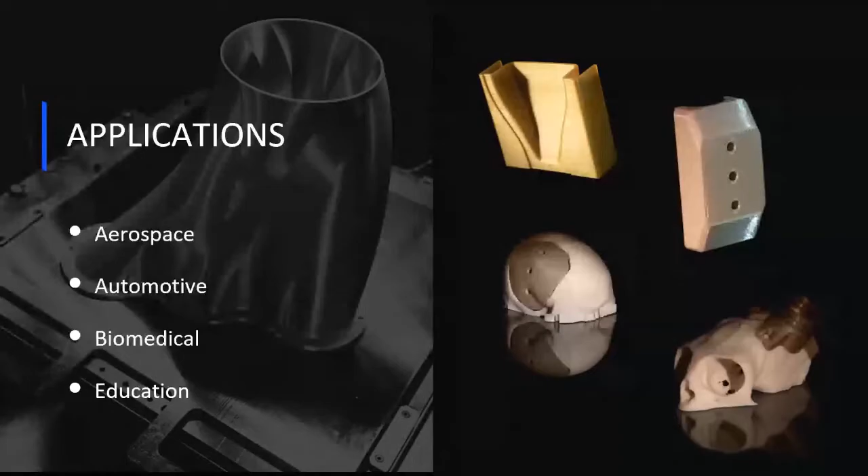So, what makes PEKK, PEEK, and ULTEM so special? If you signed up for this webinar, you've probably already heard that they're the strongest 3D printable thermoplastics on the market.

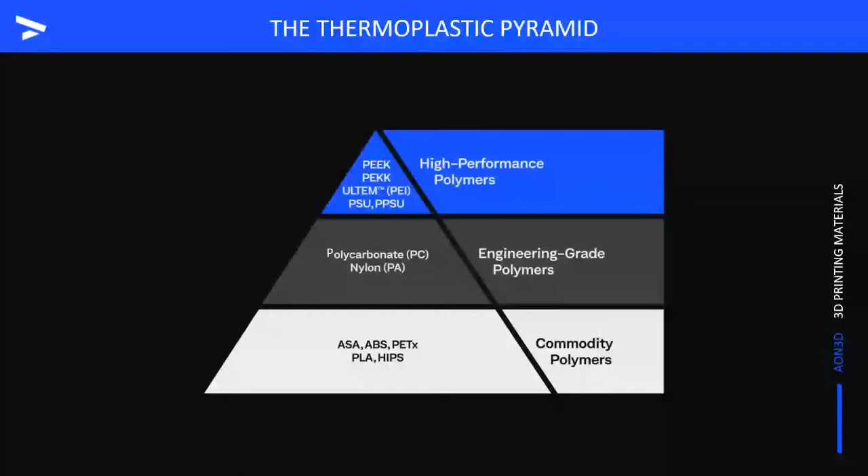In order to completely explore the exciting world of printing high-performance thermoplastics, we need to briefly touch on some of the key differences that separate these materials in the 3D printing world. Some polymers, such as PEKK and PEEK, are semi-crystalline, whereas others, like polyetherimide, are amorphous. PEI or polyetherimide is more commonly referred to by SABIC's trademark name, in North America, ULTEM.

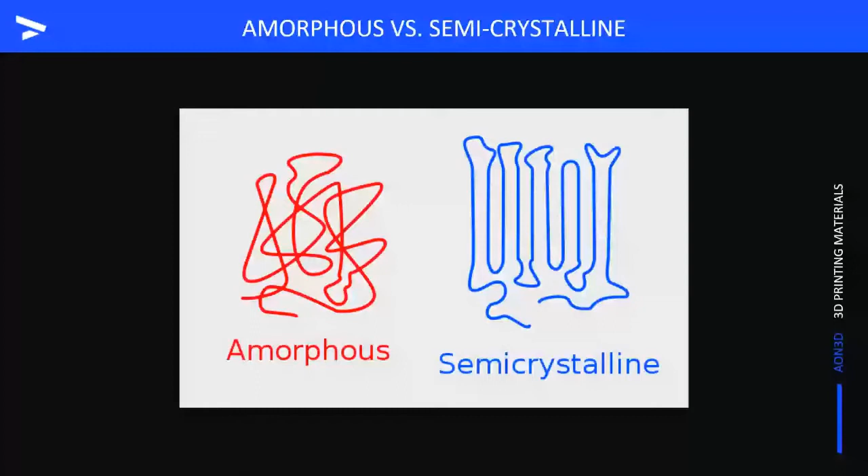To explore the differences between amorphous and semi-crystalline polymers, we need to understand the glass transition temperature, often referred to as TG. This is the temperature where a polymer changes from a rigid amorphous state to a more flexible, rubbery state. The glass transition temperature of a polymer defines its state at any particular temperature.

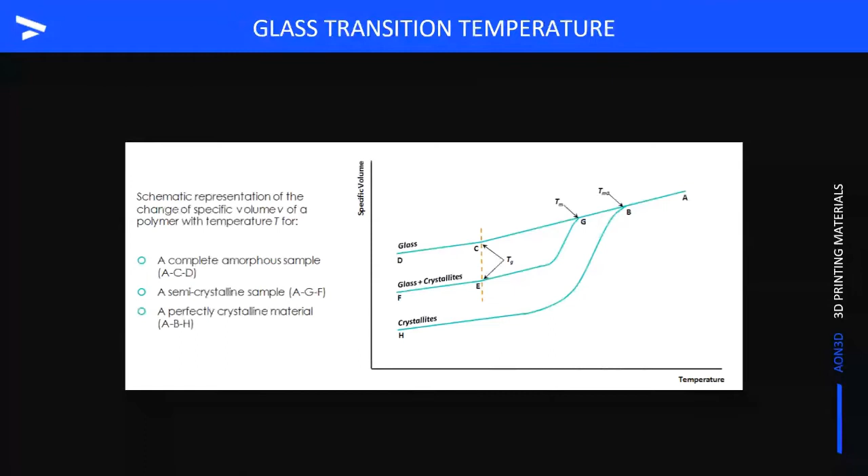For example, operating below the TG offers you the strength and rigidity. Operating near the glass transition temperature may offer flexibility. If you need to extrude a thermoplastic polymer, it would need to happen at the melting temperature or well above the glass transition temperature.

Amorphous polymers do not exhibit a true melting point. They have a glass transition temperature where they begin to change from a glassy solid to a rubber-like state. Then, at higher temperatures, they change to a viscous fluid. The disordered structures of amorphous polymers leads them to transition to the fluid state over a temperature range rather than at a distinct temperature.

When crystallized, semi-crystalline polymers contain both crystalline and amorphous structures. Unlike amorphous structures, crystals are arranged in an ordered, packed manner.

Semicrystalline polymers exhibit both a Tg due to their amorphous phase and a melting point Tm due to their crystalline phase. Their melting temperature is when all the crystals have dissociated into individual polymer chains.

Part of the mechanical strength, as well as the temperature and chemical resistances for semicrystalline polymers, come from crystallite formation. Crystallites are dense crystal packs that are held together by hydrogen and dipole interactions.

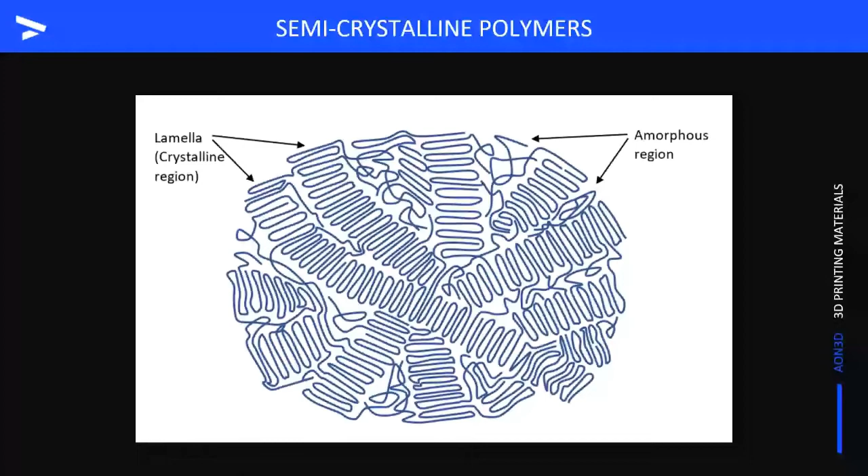When printing, crystallization rate is never constant and is largely impacted by the environment where the molten polymer is extruded. Remember that the printing environment has many temperatures affecting the crystallizing bead, the layer below it, the heated bed.

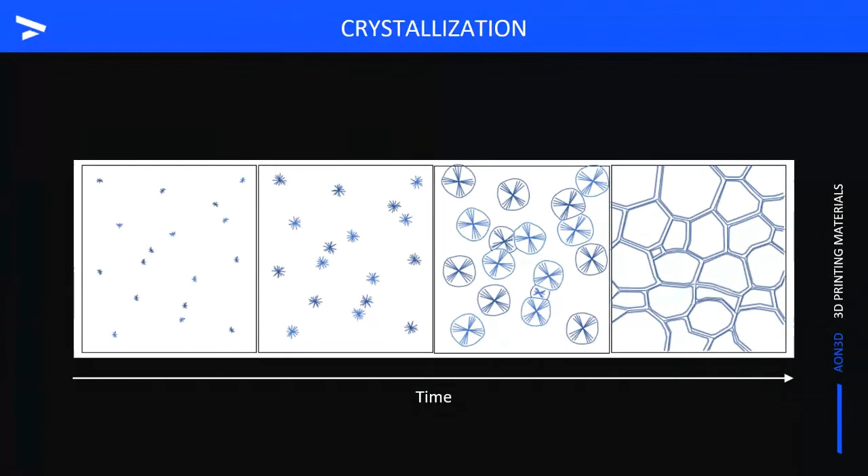The chamber temperature, the convective currents in the chamber, the temperature at the nozzle, and the layer dwell time. A quick change in temperature or a large temperature gradient between the extruded bead and the environment can result in overall low percentage of crystallization.

Let's move on to talking about our three high-performance materials, PEKK, PEEK, and ULTEM.

PEEK is a high-performance semicrystalline thermoplastic in the polyaryl ether ketone family with a glass transition of 143 Celsius and a melting point of 343 Celsius degrees.

It offers excellent mechanical and chemical resistance properties that are typically retained up to 240 Celsius degrees, although some grades have continuous operating temperatures up to 260.

It's worth noting that processing conditions have a significant impact on these mechanical properties. PEEK also resists thermal degradation and is stable in organic and aqueous environments.

It's one of the few plastics compatible with ultra-high vacuum applications, for example, as required by the aerospace industry, and also for biomedical applications due to the resistance of certain grades to different sterilization and autoclaving processes.

It can be expensive, so it's typically selected for the most demanding applications or as a lightweight metal replacement option. We suggest using Solvay's grade of PEEK filamentized directly from Solvay.

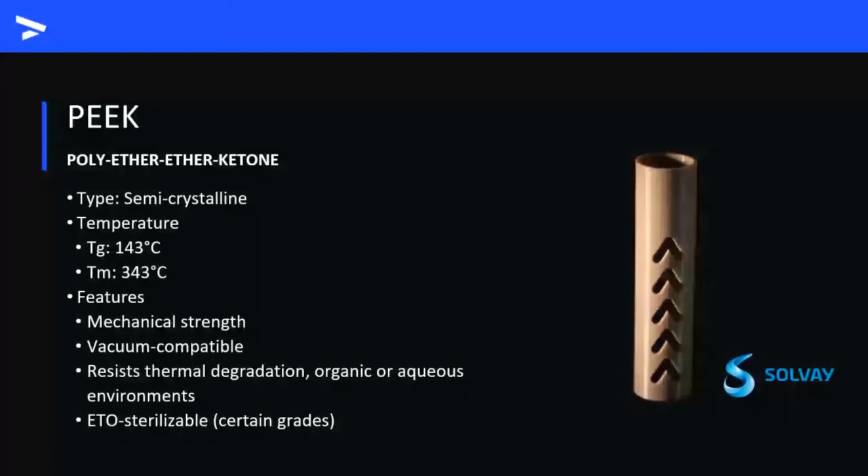They are free from additives, which affect crystallization rates, and the material handling is top-notch, from the mylar vacuum bags to the metal spools to the well-controlled diameter tolerance.

PEKK is another PAEK family member, but unlike PEEK, PEKK is a copolymer with a crystallization rate that can be tuned via the ratio of terephthaloyl and isophthaloyl.

It has a slightly higher glass transition temperature of 160 Celsius, and the melting point is 305 Celsius degrees for its pseudo-amorphous grade, and a melting point of 332 Celsius degrees for its semi-crystalline grade.

The pseudo-amorphous grade has such slow crystallization kinetics that it can act like an amorphous polymer.

PEKK is often recognized for its printability, which is due to its slow crystallization kinetics that are much easier to control than PEEK and can lead to better layer welding. It can be printed in conditions that cause it to produce either a semi-crystalline or an amorphous part.

Arkema supplies base resin for PEKK to Kimya, who provides some of the highest quality compounding and filamentization we've seen on the market.

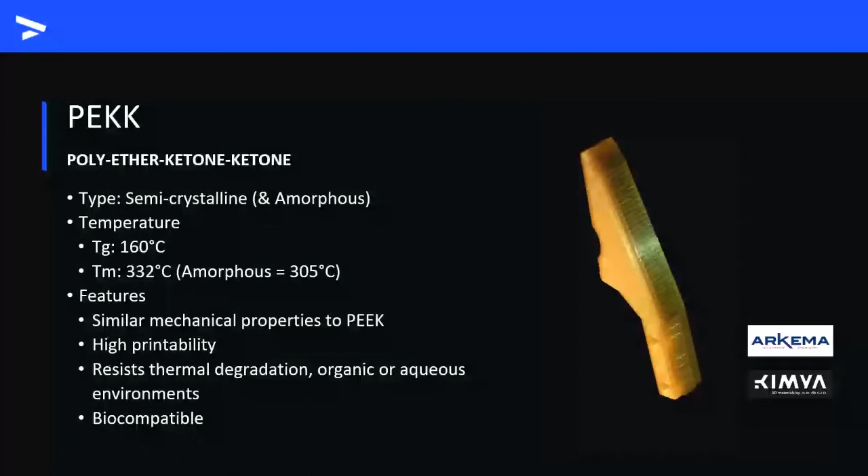ULTEM 9085, the most frequently used formulation in 3D printing, is an amorphous polymer with a Tg of 185 Celsius degrees. It offers low flammability and smoke emissions when exposed to flame, as well as low smoke toxicity.

ULTEM also offers high strength to weight ratio, good dimensional stability, high impact resistance, and broad chemical resistances.

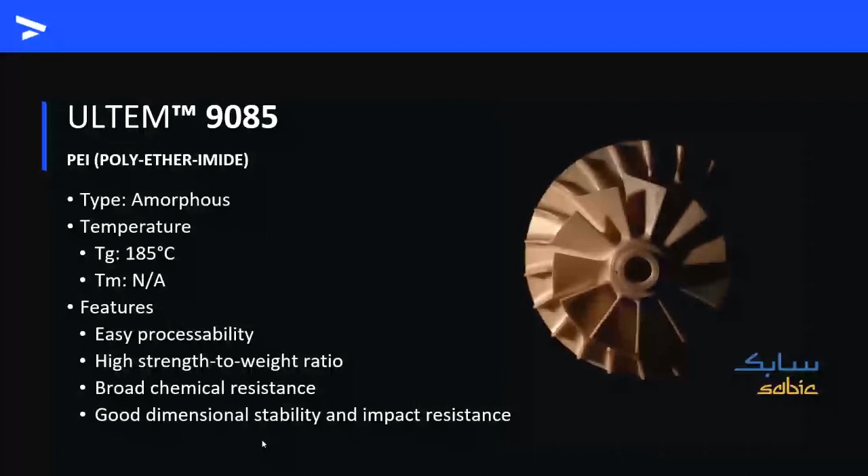SABIC, the trademark owner for the name ULTEM, is our preferred supplier. Users benefit from their exceptional diameter tolerance and access to material traceability reports.

Print success starts before you hit print and finishes long after the print run. Every one of the following steps is essential to consider, especially for high-performance thermoplastics.

Many thermoplastics are hygroscopic, and humidity accumulation can significantly impact part aesthetics and can increase degradation at higher temperatures. It can accelerate the crystallization rate of some polymers, which may contribute to layer bonding issues and reduce overall mechanical strength of the part.

In this table, you can see some of our recommended drying conditions for various polymers. We've left in other engineering and consumer-grade polymers for comparison. We won't spend too much time on this table, but generally, the best practices used for drying materials for injection molding should apply to 3D printing.

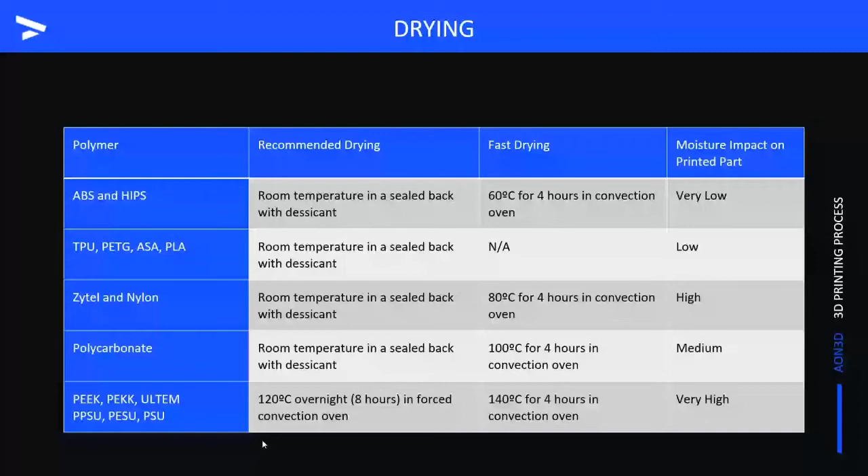When extruding, a 1.75 millimeter diameter thermoplastic filament is melted and extruded through a nozzle that is between 0.2 to 1.2 millimeters in our case, which causes the polymer chains to become constricted and organized to some degree.

Depending on your part geometry, the material you're using, and the thermal conditions in your printer, you may need to tune your extruder print speed to ensure you achieve the desired final print quality, as well as feature resolution on your part.

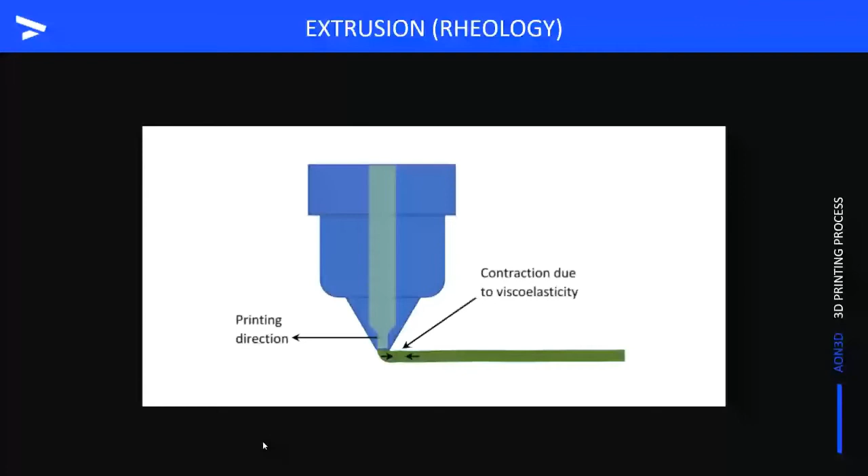Process control is about much more than just your nozzle temperature, bed temperature, and chamber temperature. Anything that alters part quality and repeatability needs to be considered.

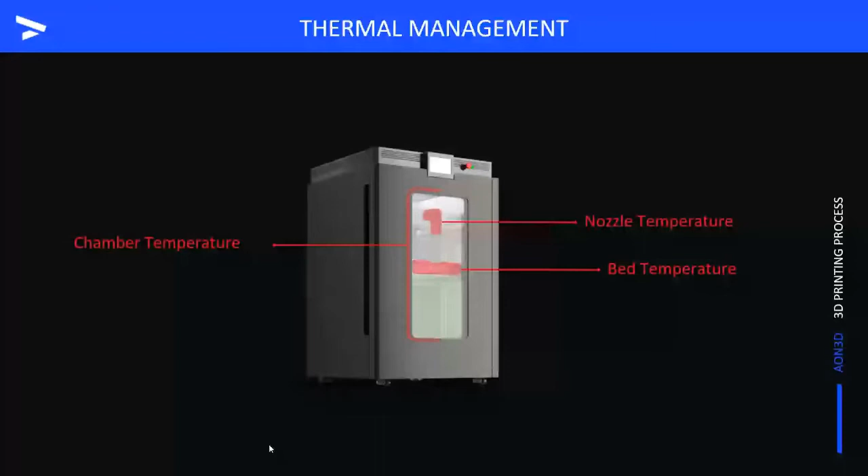For example, in a system with active chamber heating, the effects of forced convection across the part surfaces play a massive role in final part quality. Also, precise control over the melt zone impacts many things, including the responsiveness of your extruder's micro-retractions.

First layer adhesion is a topic that deserves its own webinar, and you can watch for one of those in the future, but it's key to understand the material of your build plate and its interaction with your printed material.

Poor first layer adhesion can cause warping, whereas if the first layer is too strongly attached to the plate, the part may be damaged during removal. Generally, high bed temperature, print speed, layer height, and extrusion temperature all work together to create a successful first layer.

It is well known that part strength along the vertical axis is the weakest of any of the directional axes for FFF parts. This is due to the challenge of promoting interlayer bonding along the z-axis.

When a new layer is deposited on a previous layer, it also imparts some of its heat to the layer below. This creates a temperature interaction zone between the new layer being printed and the previous layer. Many variables affect this interlayer welding zone: the temperature of the extruder and the environment, the layer height, the layer width, and the travel speed of the tool head.

For both amorphous and semi-crystalline materials, it's crucial that the environment where layer welding occurs is carefully controlled to ensure good part strength. Let's compare the layer welding zones for amorphous and semi-crystalline polymers.

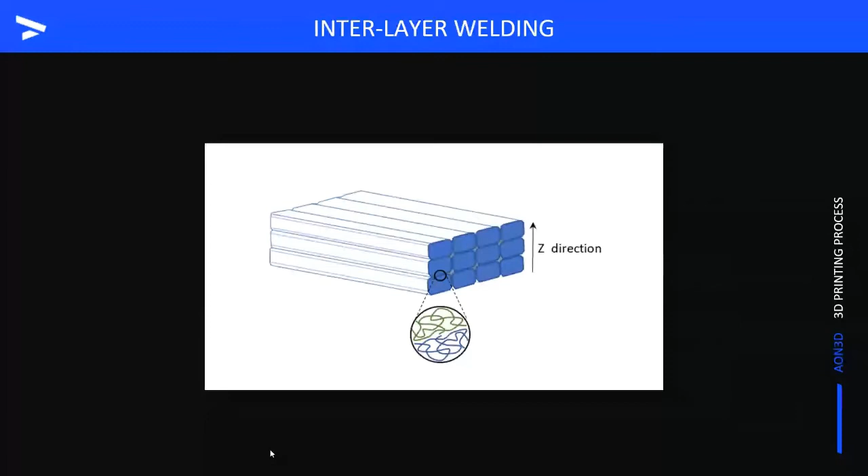As a new layer is extruded on top of the n layer, it cools towards the environmental temperature, while also transferring heat to the n layer below it. This heat transfer softens the lower layer, improving polymer chain migration and interpenetration, which in turn are beneficial for improving layer welding. We recommend that amorphous polymers are printed at the highest possible chamber and bed temperature, keeping the bed temperature as close to the TG as possible to maintain a uniform temperature profile for the overall environment.

Semi-crystalline polymers offer a unique challenge since crystallization leads to further shrinkage, which builds internal stress that may lead to deformation. Crystallization at a lower layer may prevent chain migration in the interlayer welding with the following layer.

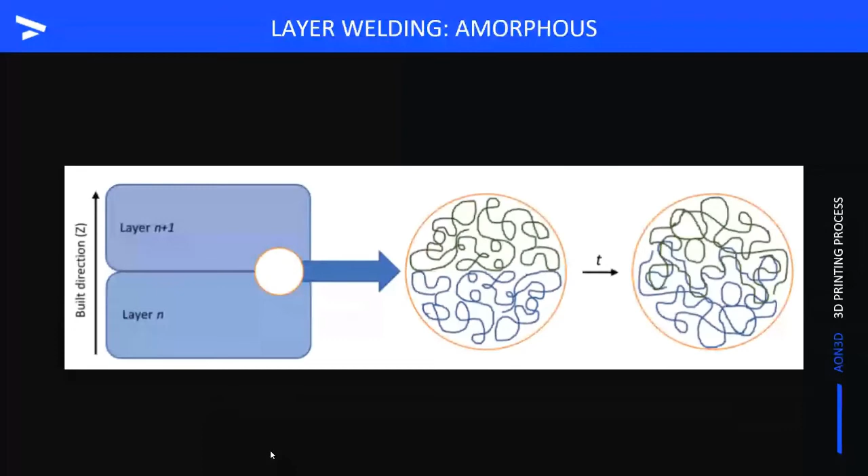There are two approaches to print PEKK. Our system gives you access to both. First, you can cold print amorphous PEKK. This is where the part is quenched from the extrusion temperature to a colder chamber temperature, resulting in an amorphous print. Crystallization is achieved only in post-processing through the heated annealing process. This provides good layer welding, but there is a significant risk of deformation.

The other method is in situ crystallization. A high chamber temperature and very high nozzle temperature promote in situ crystallization while the bead is laid down. This achieves acceptable layer welding without the need for any post-processing.

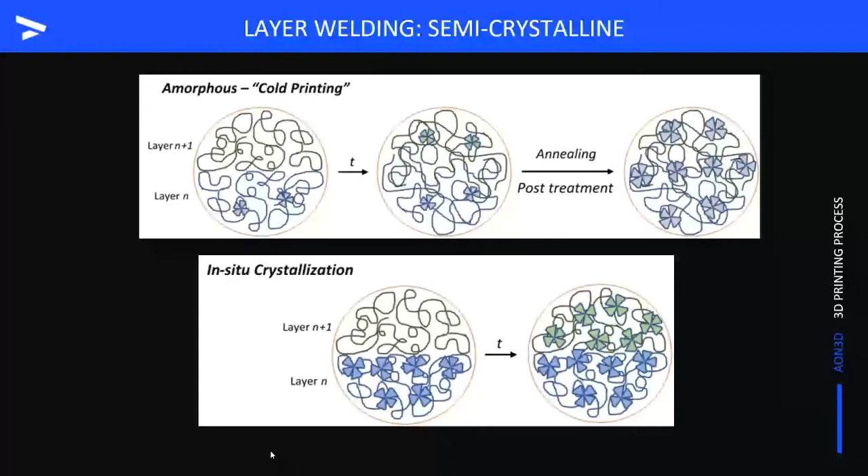Thermoplastics typically decrease in volume as they cool from molten to solid states. The environmental temperature, including the chamber and bed temperatures, have major impacts on how much the first layer shrinks as it is deposited. Each following layer that's deposited on a part will also go through the same cooling and shrinking process, creating residual stress that exists within the part and accumulates layer by layer.

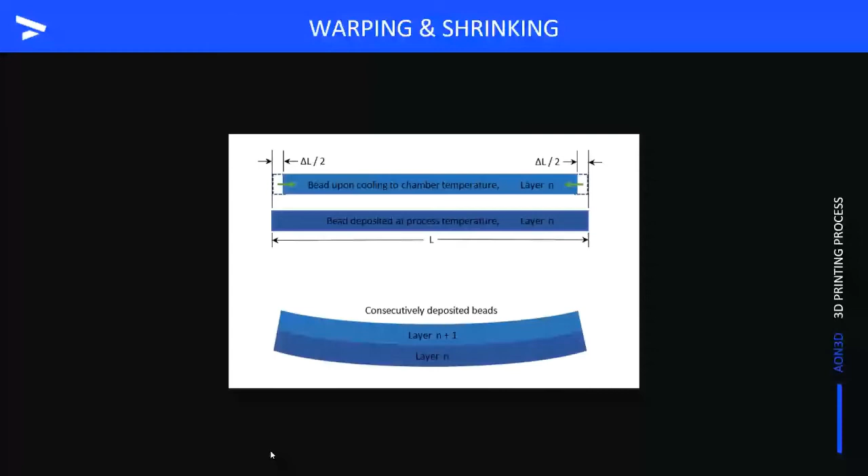When the incremental stress that accumulates is large enough to exceed the attachment force to the bed or even the interlayer bond strength, the part will warp. Usually, this results in the edges of the part bending upwards, although it can show up in other ways as well.

Annealing is a post-print heating process used to relieve internal stress built up during printing and improve crystallization in semicrystalline polymers to generate stronger and more stable parts.

Amorphous polymers can be annealed at any high temperature just below their TG. Above TG, the part can start to deform. For semicrystalline parts, the annealing can be done at temperatures above the TG but below the melting point to improve crystallization. Always dry parts using the same drying protocol recommended for the filament before you proceed to annealing.

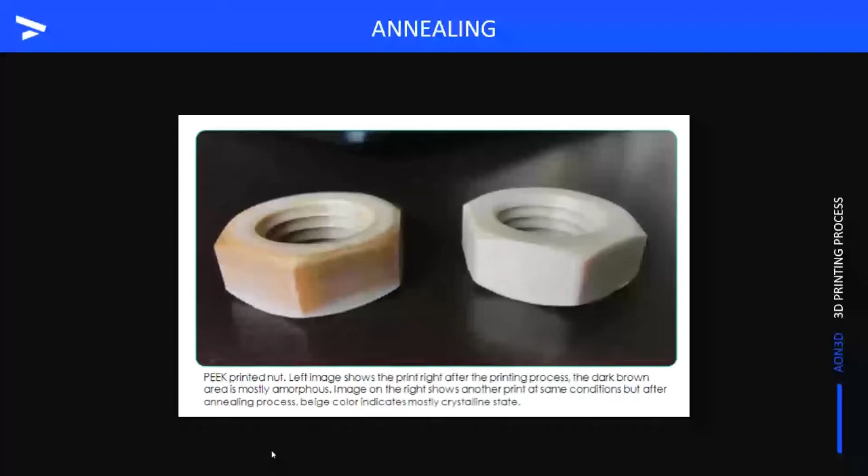So now that you have a good idea of many of the factors involved in printing high-performance thermoplastics, how do you choose the right printer for the job?

There are a number of components that are key to consider when looking at an industrial 3D printer for printing PEEK, PEKK, and ULTEM, not the least of which are the elements involved in managing the temperature of your key environments inside the printer: the hot ends, the build plate, and the chamber.

For high-performance polymers, you will need a hot end that can reach and exceed the material's melting temperature in the case of semicrystalline polymers, or will reach well above the glass transition temperature for amorphous polymers.

Look for printers that offer cooling systems, such as a liquid cooling loop, tied into the hot ends. These extend component lifetimes and also offer precision control over the filament softening profile within the hot end.

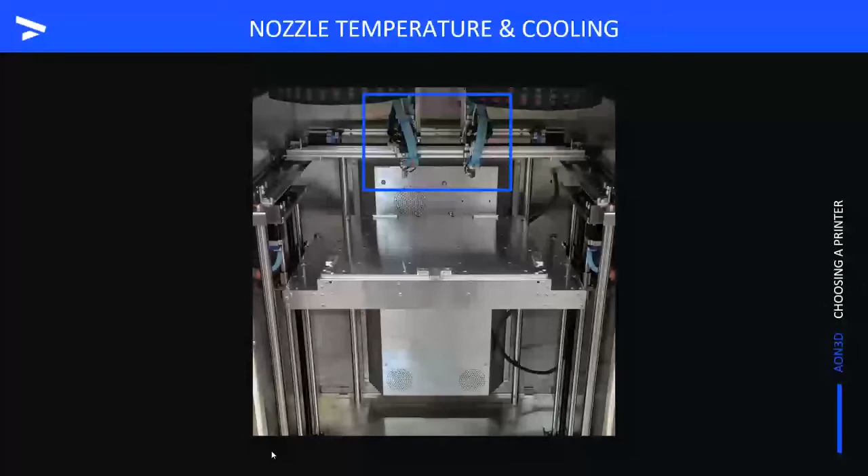The AON M2 uses dual fully independent hot ends, which can reach temperatures higher than 500 Celsius, more than enough for printing PEEK, PEKK, and ULTEM.

Since we know how important the build plate is to first layer adhesion, ensure you have a heated build plate that can reach suitable temperatures to enable the molten polymer to grab deeply into the cavities of the surface and create good interaction between the two materials.

In particular, when printing PEKK, the heat flowing from the build plate surface helps accelerate the crystallization process. The AON M2 offers a high-temperature build plate geared towards printing with PEEK, PEKK, and ULTEM that can reach temperatures above 200 Celsius.

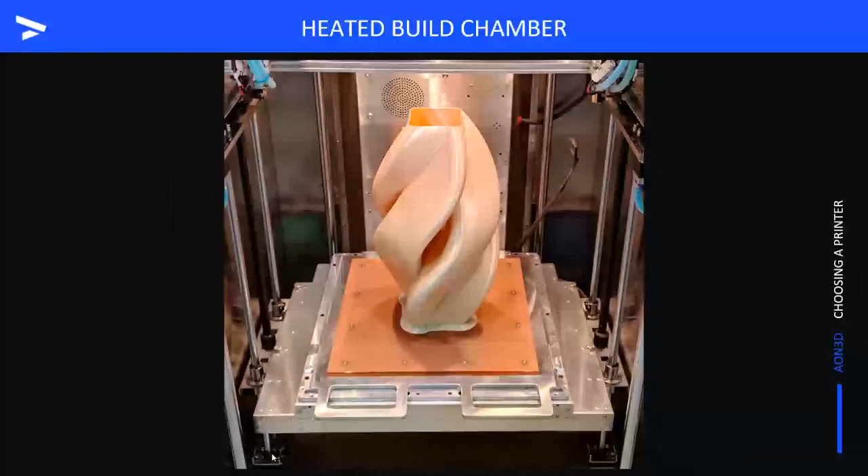An enclosed chamber is essential for printing high-performance thermoplastics, but it should be noted that not all chamber heating is created equal. Pay attention to how heat is applied within the chamber. Are conditions isothermal? Is the rate of forced convection controllable?

When you're considering acquiring an industrial 3D printer, ensure that it uses active chamber heating, meaning there is a mechanism for circulating the air in the chamber to create isothermal conditions throughout the print run. Some 3D printers offer chamber heating that lacks that active component, which results in uneven heat distribution and can create additional challenges for achieving high-quality prints. The AON M2 has an actively heated build chamber and can reach 120 Celsius.

The largest advantage of a secondary nozzle or extruder is the ability to seamlessly print breakaway or soluble support materials. Having a completely independent secondary nozzle on a toolhead assembly, rather than having it on a lift mechanism or sitting coplanar, minimizes the risk of nozzle-to-part collisions or molten filament dripping and oozing onto your part. The AON M2 offers dual independent tool heads.

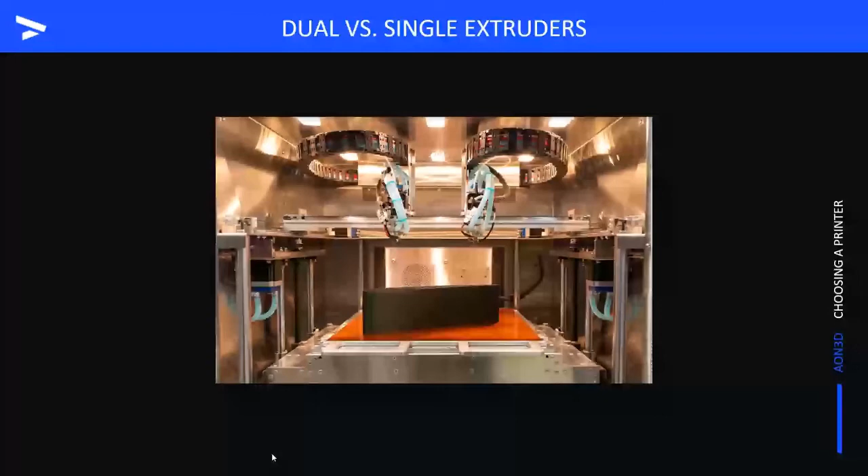When considering the parts you'll be looking to print, it's useful to be able to print more parts more ways. A larger build envelope offers the flexibility of printing large batches of smaller parts, as well as printing large tooling in one piece. Unlike other plastics that might lend themselves to post-processing techniques such as bonding that allow you to fit together smaller parts, PEEK, PEKK, and ULTEM parts offer some challenges in this arena, which is why it's incredibly useful to be able to print larger parts all together in one piece.

At 18 by 18 by 25 inches, or 450 by 450 by 640 millimeters, the AON M2's build chamber is massive.

When looking at an industrial 3D printer, you should consider exploring its slicer, as well as any software used for controlling the machine. Some important questions to ask are: how accessible is the slicer, and will it cost you anything? Does the provider include machine-specific build profiles for key materials? Can I control the 3D printer remotely from a computer? Can I air gap my machine?

At AON3D, our printers come with a license for the widely used slicer Simplify3D, as well as build profiles for a wide range of materials from leading chemical companies, and a lifetime license for our proprietary software used for controlling the AON M2.

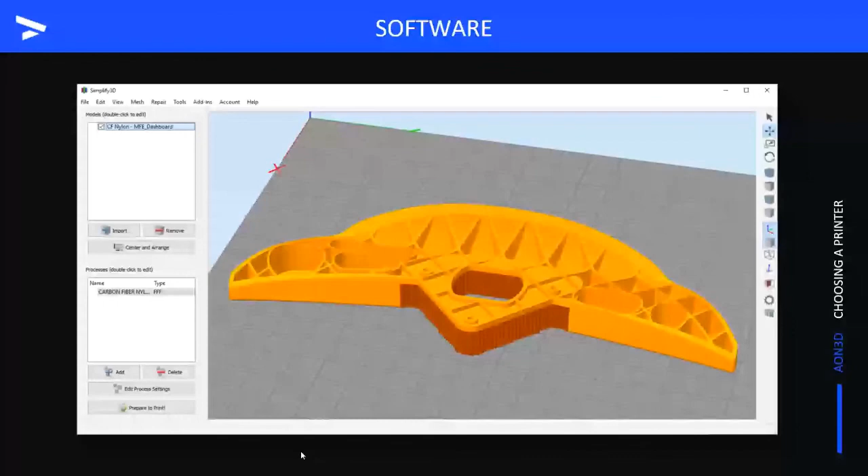Our system is built for flexibility. While we suggest Simplify3D, you can use raw G-code generated in MATLAB, or use Cura or any other open platform slicer. Customers also have the option of downloading firmware updates online or air gapping the printer for security purposes, and we'll ship you the updates for installation.

A major consideration in the industrial 3D printing space is whether your system is an open or closed materials platform. Are you locked into using expensive proprietary materials and per-material license fees, or are you free to unlock the thousands of filaments available on the open market?

At AON3D, we are committed to an open materials ethos. We want to provide platforms that allow users to print with any filaments they choose, since new materials unlock new applications. This also drastically reduces operating costs by allowing users to buy from a competitive, rapidly commoditizing materials market that eliminates the risk of supply chain singularity.

This comes with the built-in flexibility needed to develop your own processing parameters, which is essential if you're developing or working with your own materials.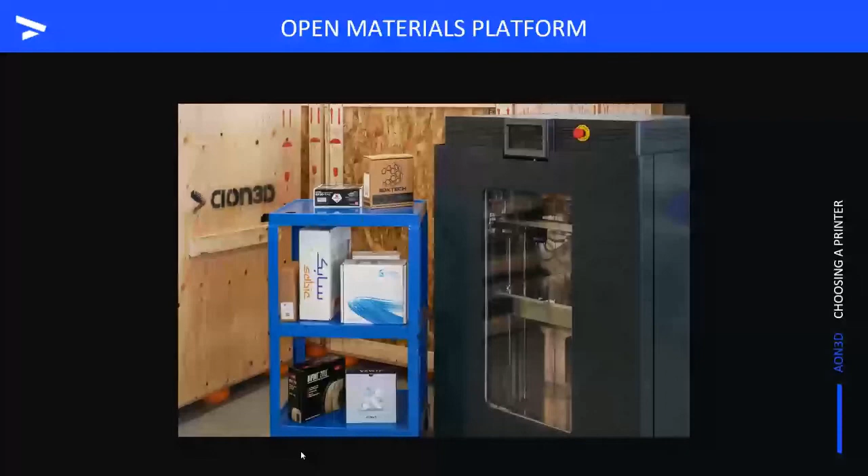AON3D was founded by a team of materials engineers with a focus on improving accessibility to additive manufacturing with functional materials. 3D printing high-temperature thermoplastics and achieving high-quality parts requires expertise beyond what can be learned from printing PLA on a desktop system. This is why it's important to invest in a hardware original equipment manufacturer that is also geared up to be a solution provider, one who understands how polymer chemistry and process parameters impact final part properties.

AON3D's team of application engineers is here to provide end-to-end training, material selection advice, build profiles and slice audits, as well as general applications expertise and support.